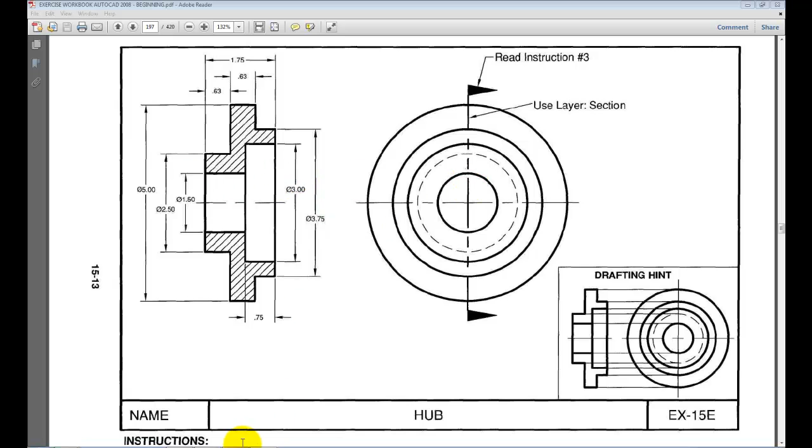Okay, this one here we're going to do the hub. So there's lots of ways of doing this, but I'm going to go ahead and start off with the circle part. See how they do circles here. Then they do some lines off the quadrants and kind of offset some stuff. So let's go ahead and get started on this first, and then we'll get onto this drawing next. But we have to look at the second drawing to get the sizes of these circles. Okay, so circle sizes are here, and then we're going to draw them. So let's go ahead and get started.

The OSNAPs you should be using are endpoint, probably midpoint, center, quadrant, and perpendicular. Okay, so make sure you have the first three, quadrant and perpendicular on. Okay, so let's get these circles made. Doesn't matter where, just get started. So D enter 1.5, repeat circle. We got 2.5, 3, 3.75.

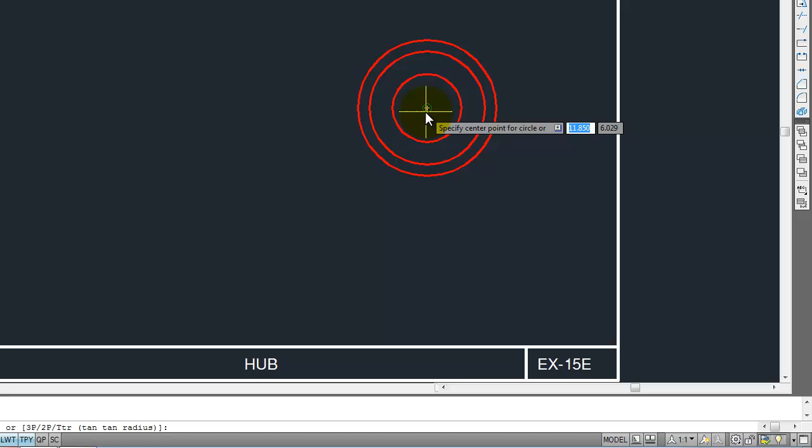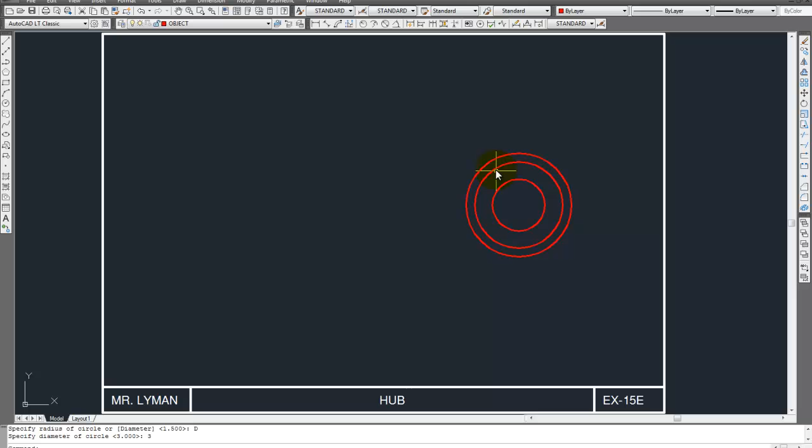Oops. So next one is D enter 2.5, repeat circle, D enter 3 enter, repeat circle. Was it 3? Was there 3.5? Let me double check that. I don't think there was. 3.5. Yes, 3.75. Okay, so first one, second one. Oh, that was D enter 3 enter. I had that. D enter 3 enter. I'm getting myself confused here.

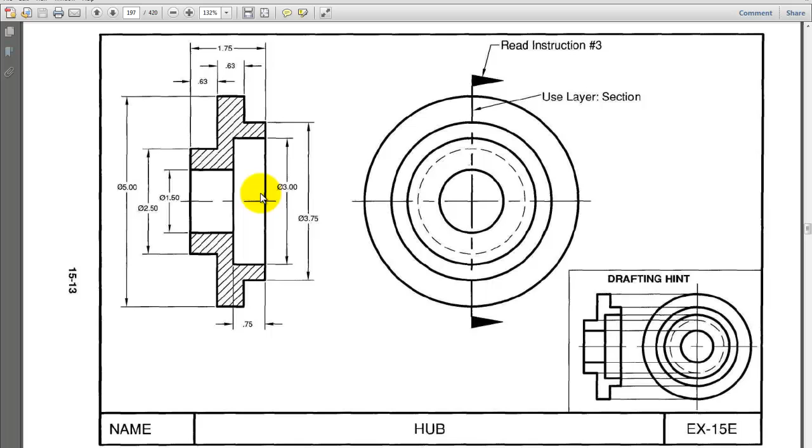0.75. Yeah, 2.5, 3, 2.5, 3, 3.75, D enter 3.75, and then D enter 5 enter. Okay. The second one, I think it is in hidden. Okay. Let's go ahead and offset this outside one. O enter 0.25.

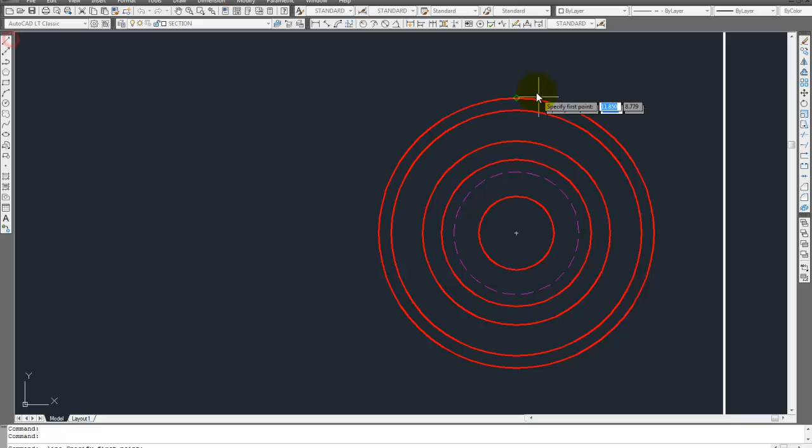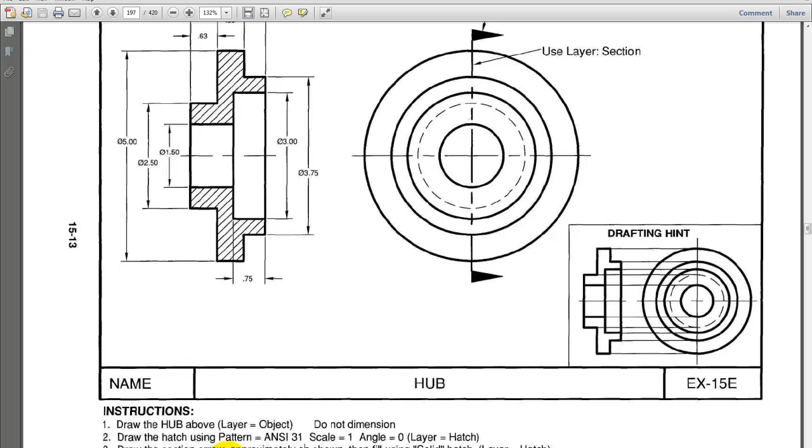Okay, go here, section, line, quadrant to quadrant. Then this one here is actually a center, quadrant to quadrant, or perpendicular is fine. Okay, get rid of this outside circle. We have that. Now we're going to draw these little things in. So it says use to draw the section arrow. What's this guy doing? Use the fill. Okay, so let's go ahead and do that.

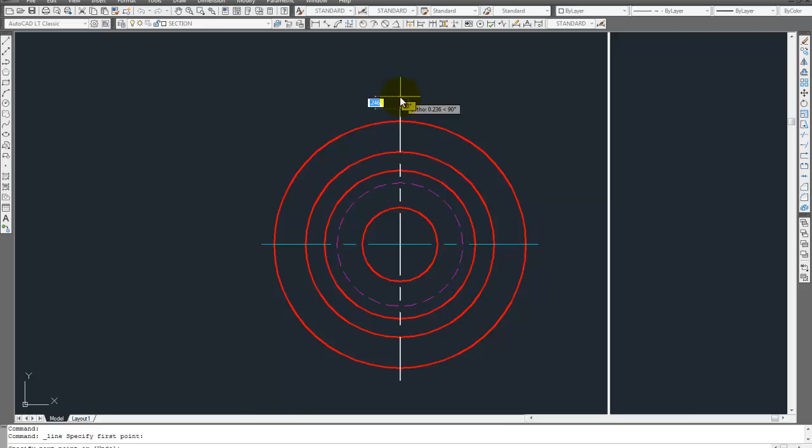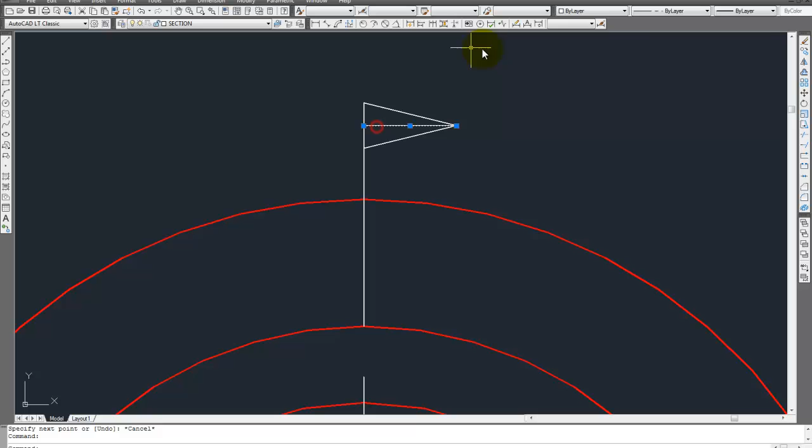So let's take a look up here. I'd come up, turn that ortho on. I'd come up maybe a little bit, maybe get an idea, maybe something like that. Go to the midpoint, come out kind of far, like that, and come back. Take that ortho off right now, and then right there. Okay, erase. Let's fill it in. So that's the hatch button.

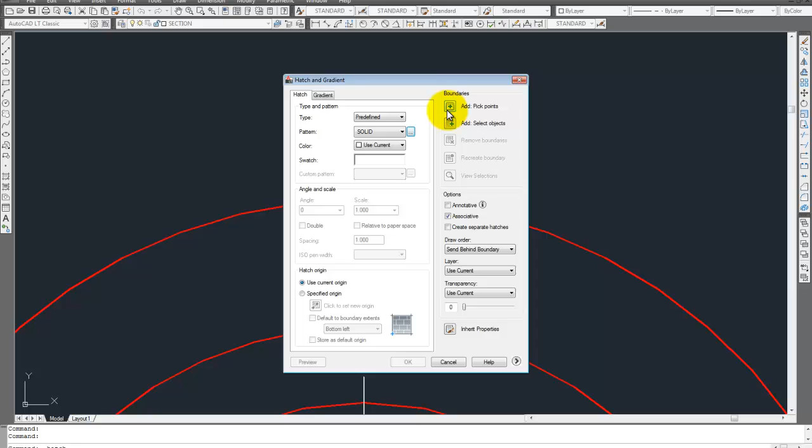Make sure you pick on the solid. Okay, oops. So you should pick on your pattern. Make sure it's, see if this one here, like this, other, solid. Okay, pick points, click inside, enter, click OK. Good, I like that. So let's just go ahead and copy this guy. And I'm going to grab it this time from the top and bring it down here. Okay. Okay, so we have that.

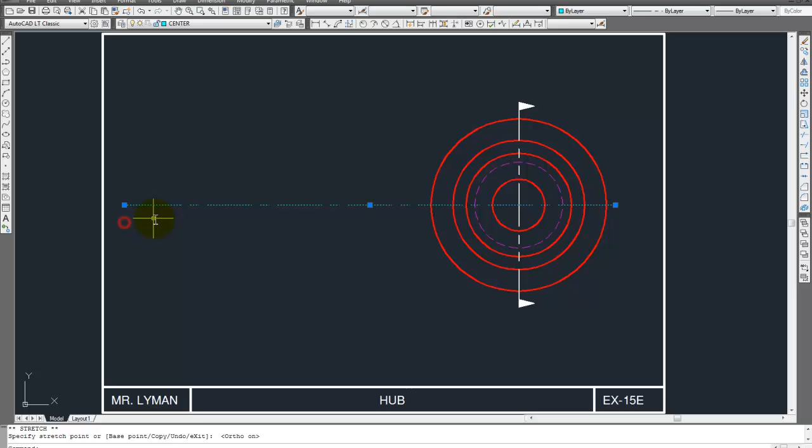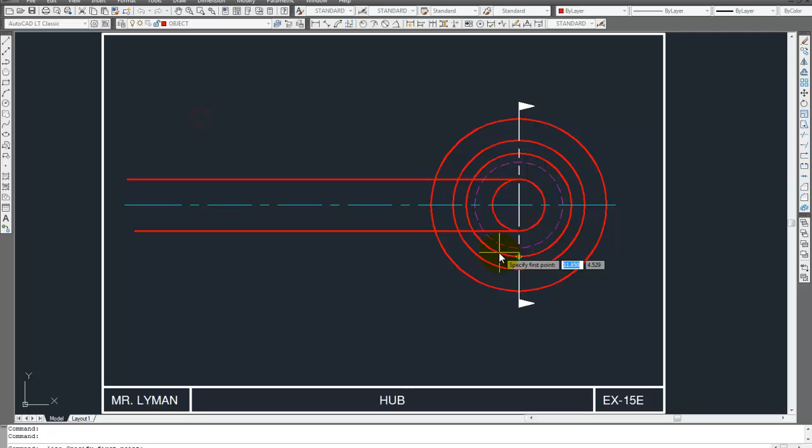Now here's the more trouble part. Since it's symmetrical, we'll just build the top one and then we'll just mirror it. How's that? So let's just go ahead and drag this guy, turn my ortho on. Just drag him out like that. And let's go ahead and get all these lines out there. So we got, just go ahead and drag them out. We'll fix the... Oh, that's right, I said I wasn't going to do the bottom stuff, just the top. So we can just do a mirror.

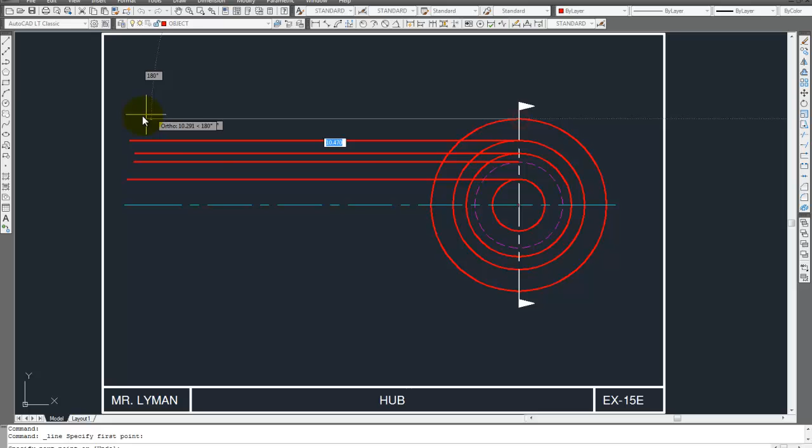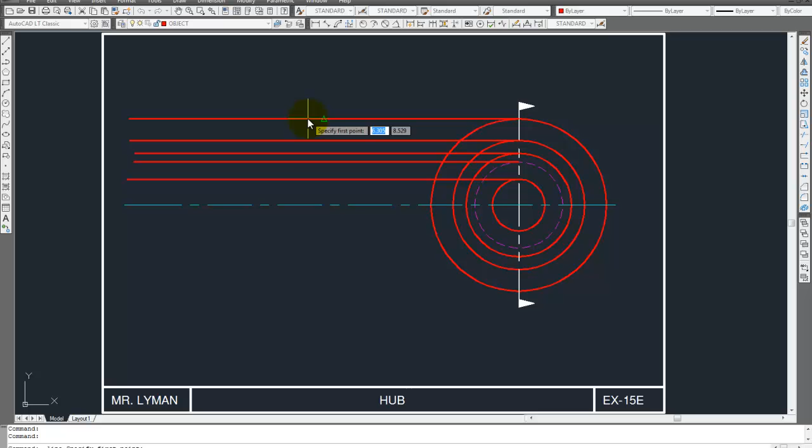Okay. What's that? Alright, so click on line. Let's come down to... Is that too close to start the line here? See, it's giving me the midpoint, but just come up here and then come down because I don't want to. And then we'll just shorten these lines to the perpendicular. Oops, I just moved it, but yeah, do something like that. Okay, this will be our starting line right here.

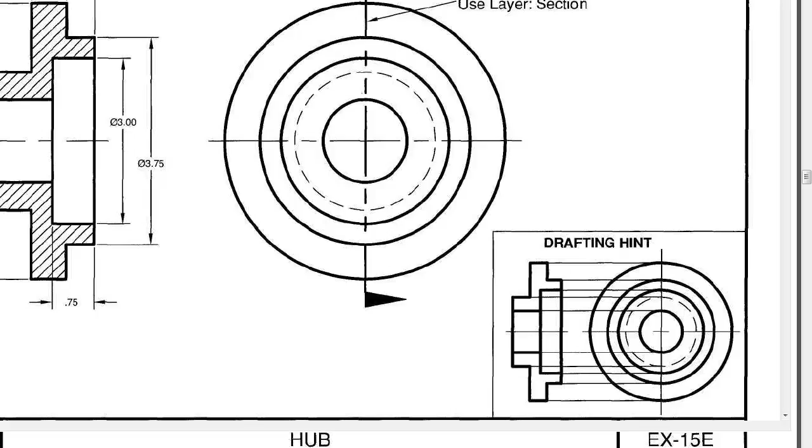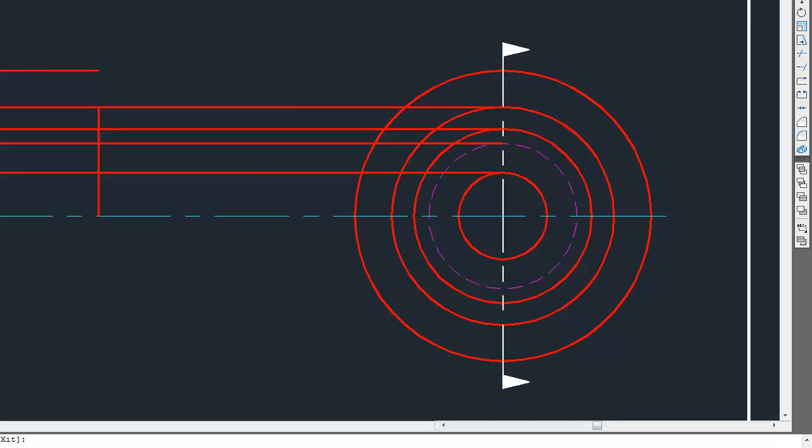So this first line is the 3.75, so that goes to the second circle. So this one here, let's just drag these guys to the second circle. That one goes there. Okay. And then actually I could have done this first. Trim this piece. So let's get rid of some lines. And then we can bring this guy down to there. Okay, so that's this line right there. Remember, we're starting from here and we're going up.

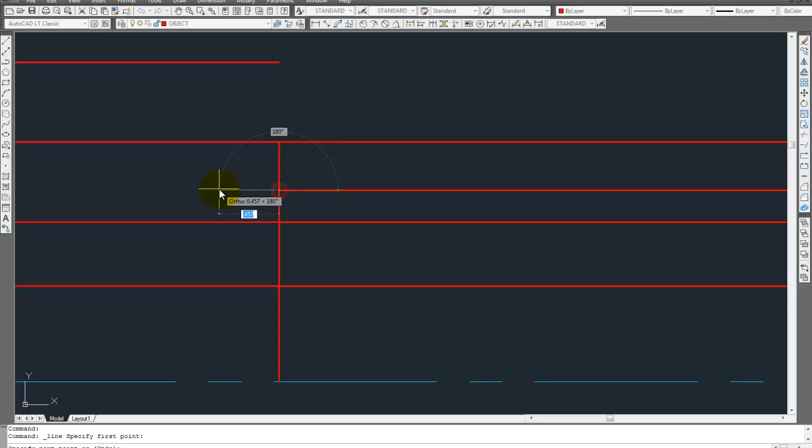Okay, so at the 3, we got to come in 0.75. See that 0.75 right here? With the circle of the 3. So the 3 circle, which is this one, bring them back. And then how far we got to come? Actually, we need that location, but I'm just going to click on line and then come out 0.75. I don't need that line no more there. Okay. So that's that line, and then we come straight down to the center line. So just give me a line that comes down perpendicular.

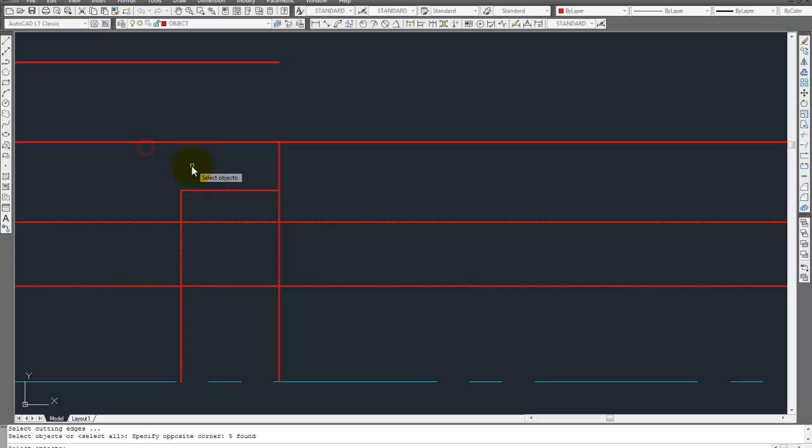Okay. So let's go ahead and trim some of this stuff out inside. Get rid of that, get rid of that. We can get rid of that. Okay. Let's trim this piece off too. That's the 3.75, yeah. Okay. So we have that. So we got this piece. Well, let me double check. Yeah, that's the top. Okay, let's take a look at this piece right here.

We got to come up to the top, but what's this distance right here? It's 0.63, 0.63 subtracted from 1.75. So that's 1.26. So 1.26 from this, it's 0.49. So 0.49. That's how far that line is going to be going there. So let's go ahead and do this. I don't want to lose that spot. Oops. Oh, it's actually this one here. That's not the 5, is it? Yeah, it's here.

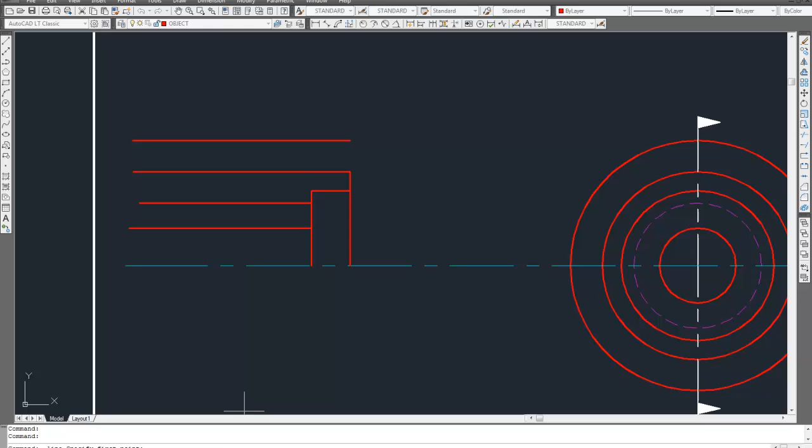So from here, erase that line, and then we got to come in, like I said, how far? 0.49. Okay, and then we come up. And then you can go ahead and just drag this guy to here. Okay, so that's that. Comes up. Now this line comes over 0.63.

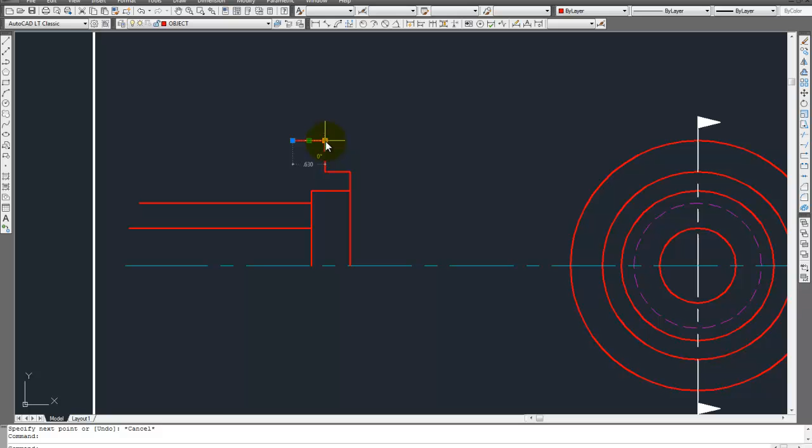0.63? Yeah, I guess it is. 0.49 up to the 5. Then we got to come down this distance right here.

So the distance from the 5 to the 2.5. I'm going to draw that line back in there. So where's the 2.5 guy? Is this the 2.5? I think so. Yeah, 1.5, 2.5, 3. Just double check. Yeah, that's the one. Okay, bring him down to there.

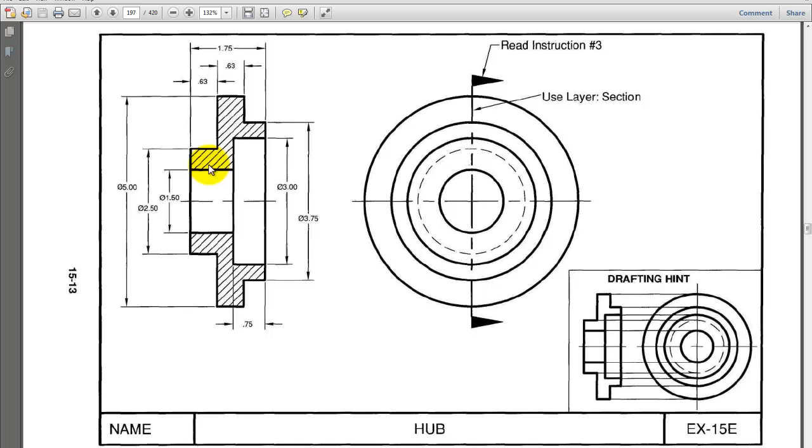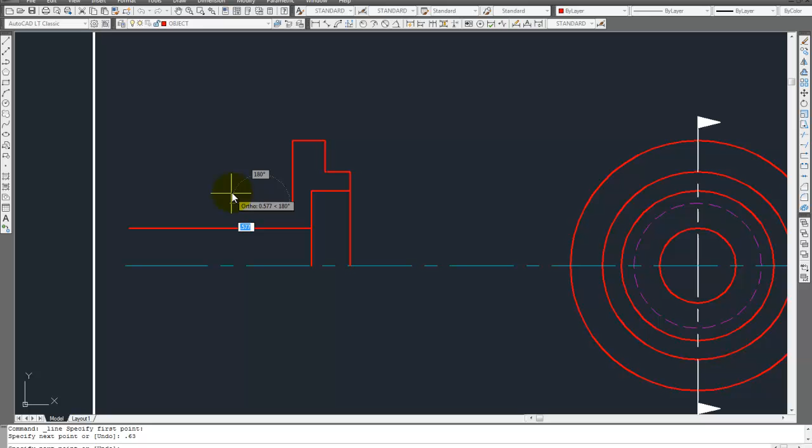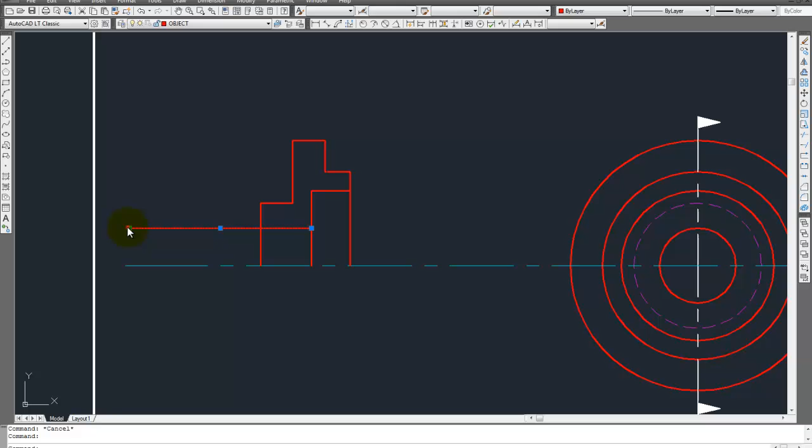That's this piece. Then we got to come over 0.63. So I'm just going to come over. We can get rid of this line. So it's 0.63. That's that piece. And then we came down straight down to the line. So come down to here. Okay, what do we got to do with this thing right here? Take a look. And then it comes right there. So let's bring this guy back to there.

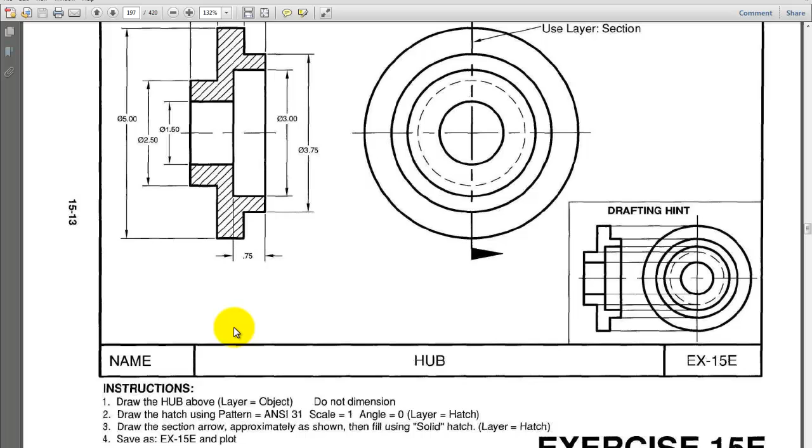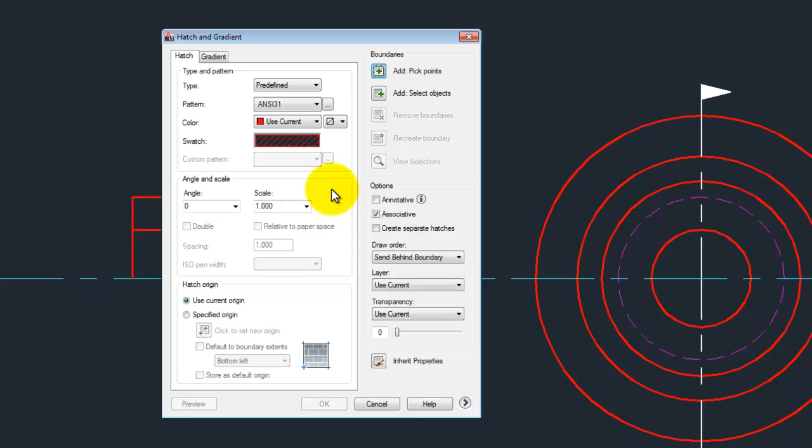Now, to get this little pattern looking deal, use the hatch pattern ANSI 31, scale 1, angle 0. So let's do that. Hatch, my pattern, ANSI 31. Angle 0, scale 1, yeah. Pick points, click inside, yep. Enter, click OK. Let's make this hatch, actually hatch.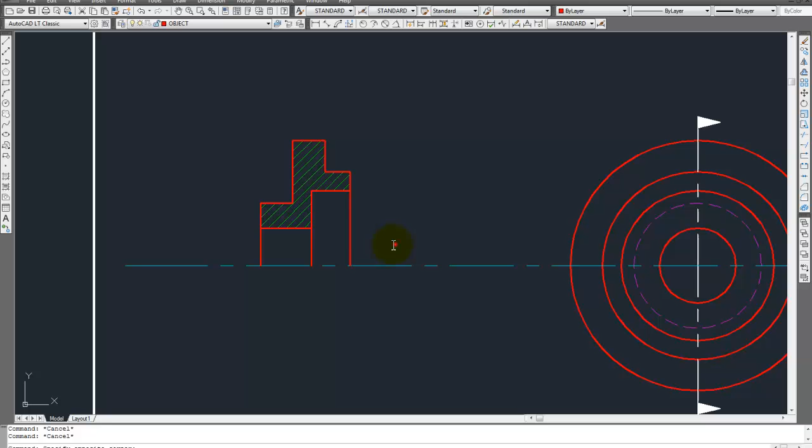Okay, I think we're ready to mirror it now. So select it, mirror button. Go ahead and click on here and then just bring it down. Click, enter. Okay, so we got that.

This line here, let's do this 0.125. See how that line kind of sticks out a little bit here? Sticks out here. So we came out 0.25. We'll go O enter 0.25. Come out, come out. Bring this guy back to there. Actually, we got to bring this guy back out there then too. O enter 0.25, enter.

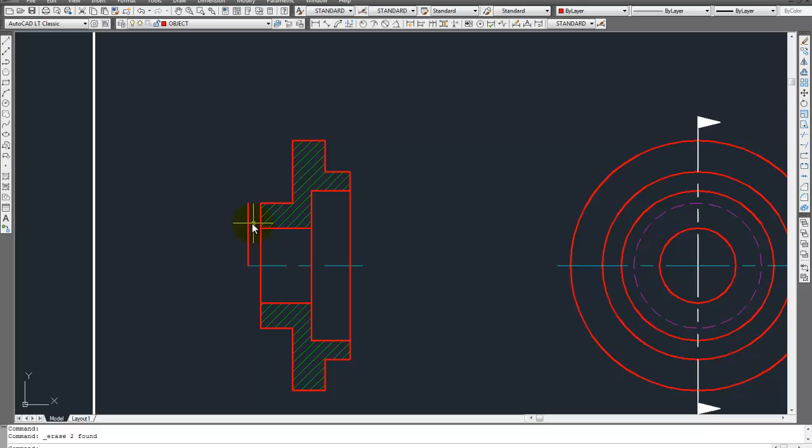And we'll trim this. TR enter. Get rid of the stuff in the middle. Good, get rid of that. Get rid of that. Okay, get rid of this. Okay. Z enter, A enter. Right.

And then now, don't worry about those leaders right there. But we definitely got to get these guys in here though. So let's go ahead and put these dimensions in here. So dim.

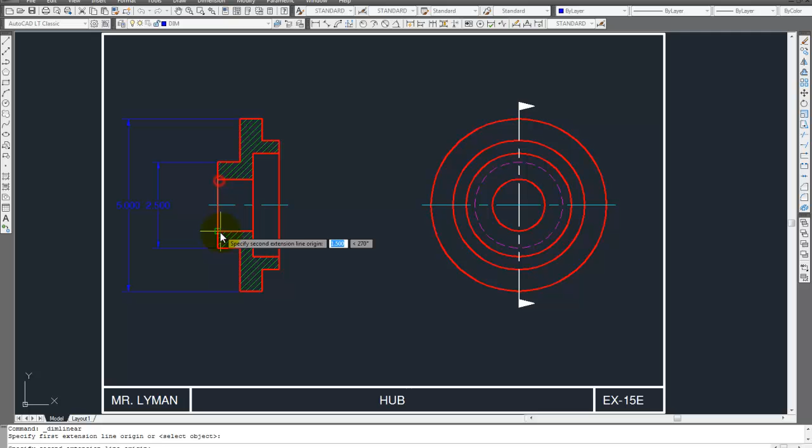5 comes out 2.5 and 1.5. Okay. It's actually got the diameters. So here's percent.

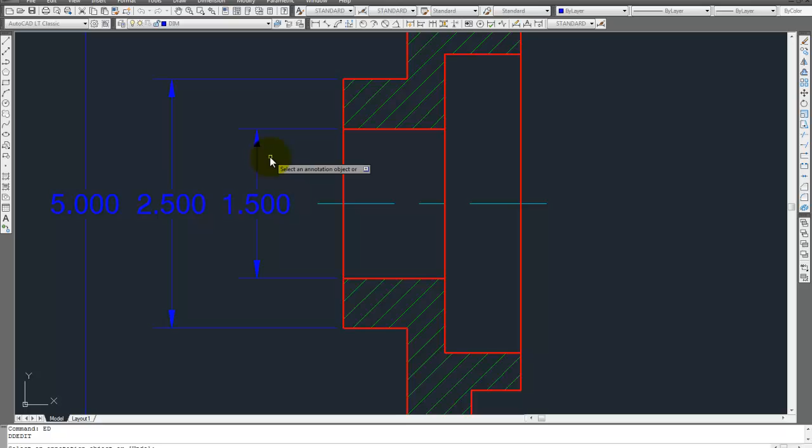These are all actually a little bit bigger looking too, those dimensions. Alright, here's how we're going to need to put in this diameter symbol. So there's lots of ways of doing it, but one way is go ED, enter, click on it, then you're going to go percent D. No, I guess it's percent C. Percent C? Yeah, percent C. That gives us the diameter symbol.

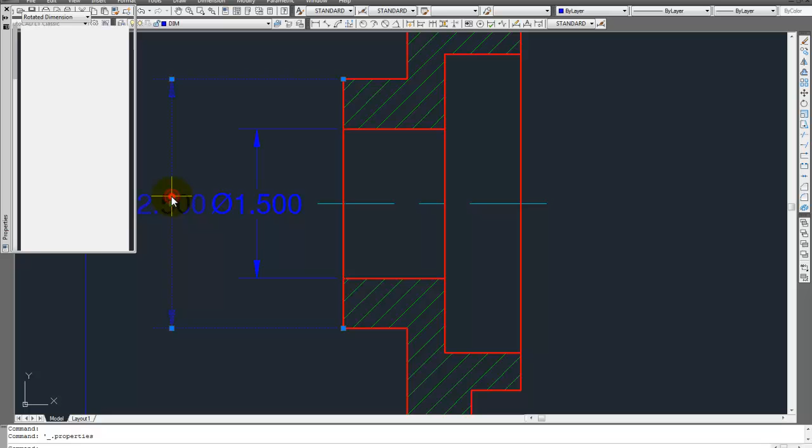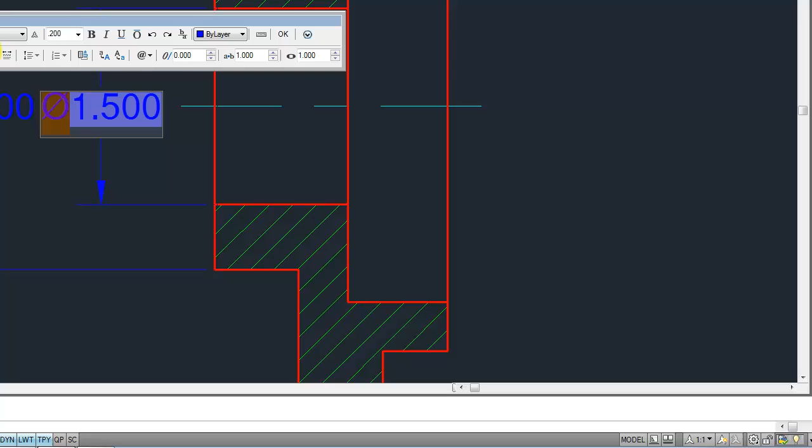Okay, let's go ahead and do that again. Actually, we just copy it now. So we go ED, enter. Copy. Actually, there's a button in here that does symbols too. So there it is right there.

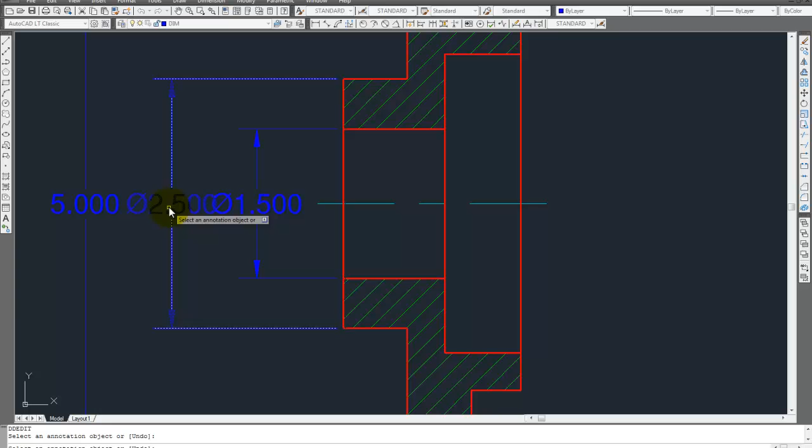Okay, so here's another way of doing it. Just go ED, click on it, then you can go to the symbol and go diameter. Alright, that's another way. Do you want to save your text changes? Yeah, of course I do. But then don't worry, we're going to make these guys smaller in a sec.

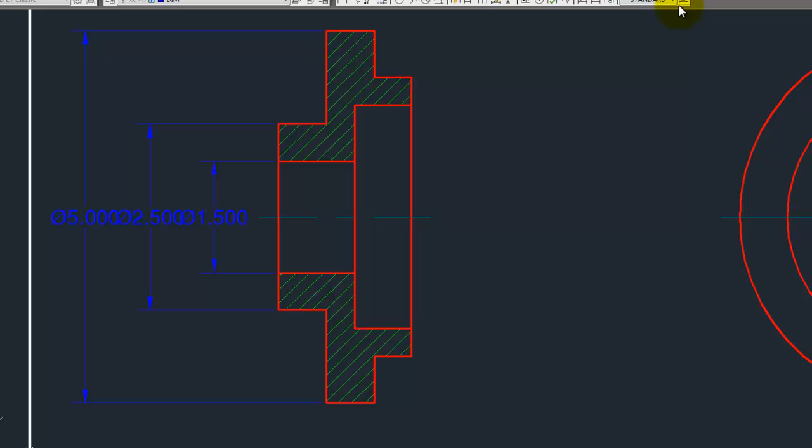So again, ED, enter, click on it. Diameter. Yes, I do. Okay, what's the size of these dimensions here? I'm going to take a look at this real quick, because those are a little bit too big, see that?

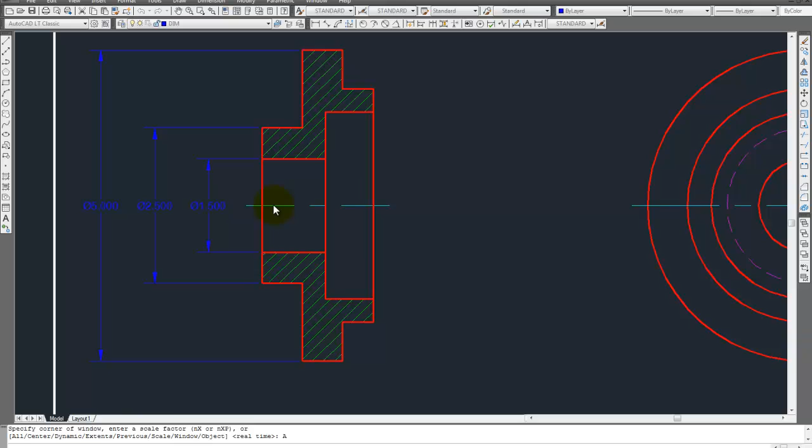So go modify, since we're going to change everything. Let's go text height, let's go 0.125. Okay, close. Yeah, that's what I want. Okay, so make sure you go 0.125 for your dimensions on that, okay? Yeah, that looks like something what they have. And they actually have 3 zeros here too.

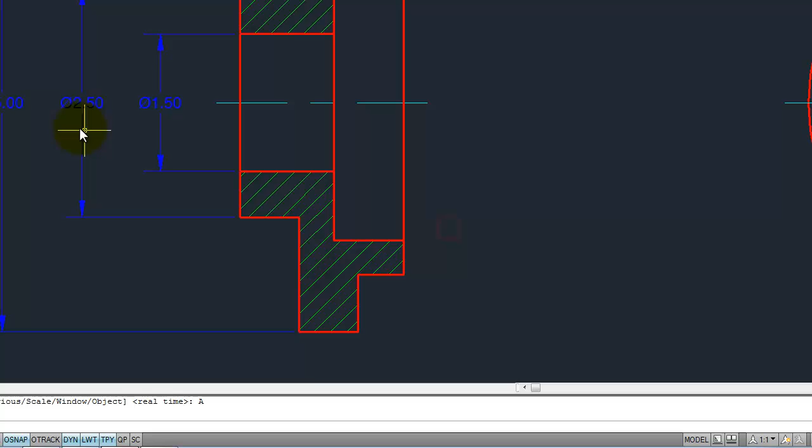Boy, we got a lot to do on this, don't we? So we got to go back to here too. We're going to go to modify, go to primary units, and make sure precision is set to 2 as well. And go OK, close, and that changes it to 2 decimal places.

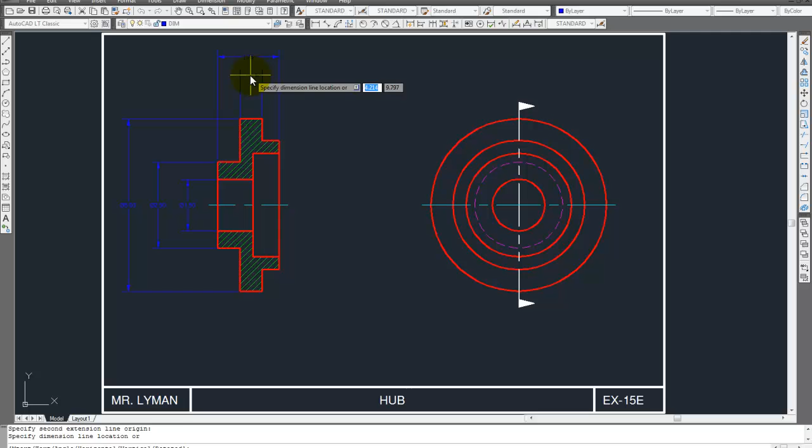Okay, so there's those. Let's take a look at the top ones now. Here to here, good. Looks like they went from here to here. And where'd they put that? They put that 0.63 inside. So use that dimension text edit button. Shove it in there.

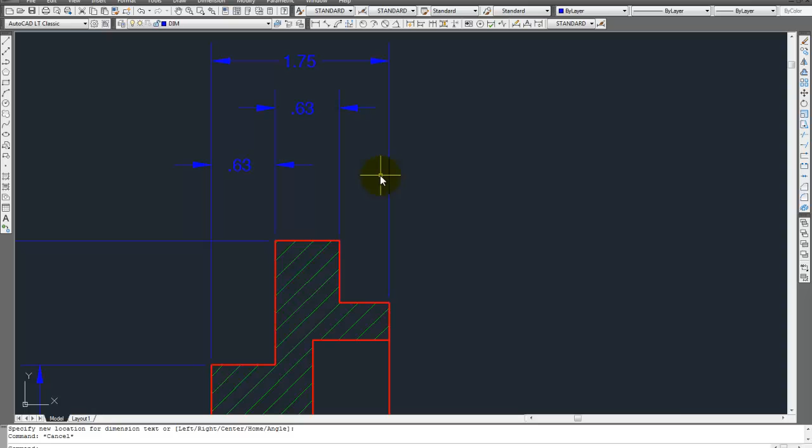And this 0.63, we got to shove it in there as well. So dimension text edit. Shove it in. Okay, those don't need diameter dimensions because they're not circle sizes.

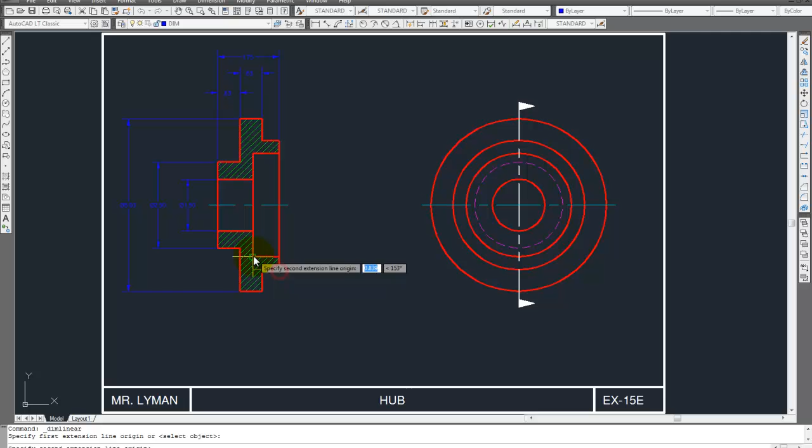Then we got to do another dimension here, the 0.75. Oops. Where'd they go? Yeah, they went from there to there. Okay, let's do that. Here to here, break it down. Where's that 0.75? It's inside. So dimension text edit, shove it inside. Yeah, the arrow's popping out, so like that.

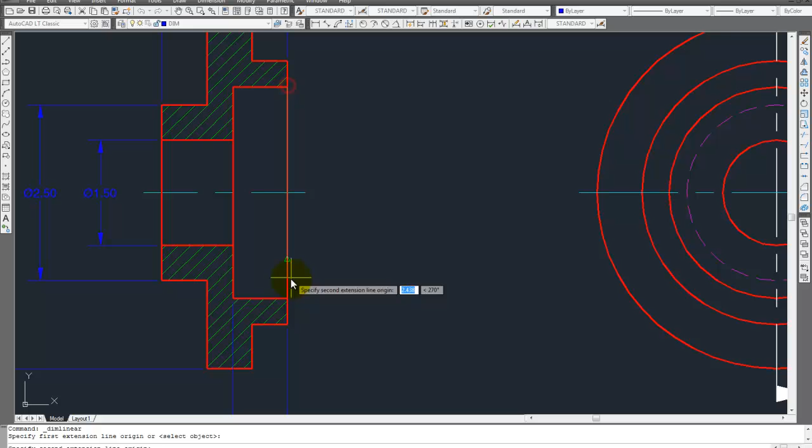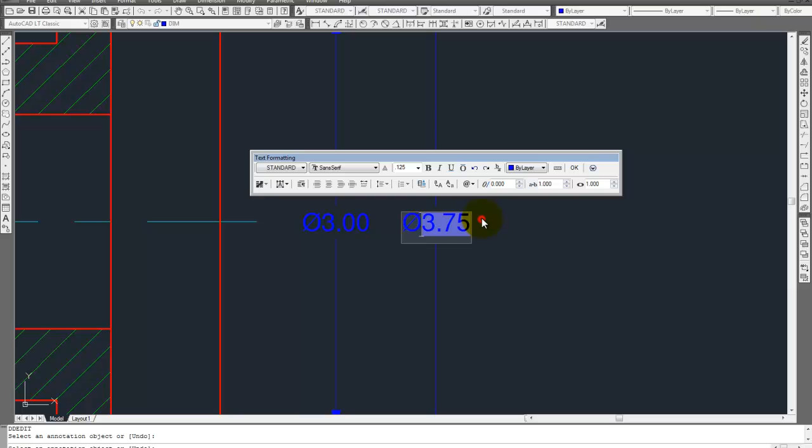Okay. Now we got those 2 diameter dimensions. Let's go linear, here to here, 3. Here to here. And then again, ED, enter, click on that, go to the symbol button, diameter. Okay, click on that, diameter. And I think we got it. Okay, again, there's lots of ways of doing it, so not too bad though.